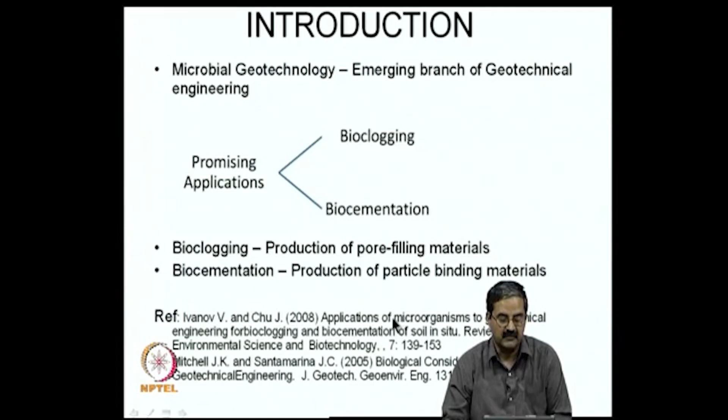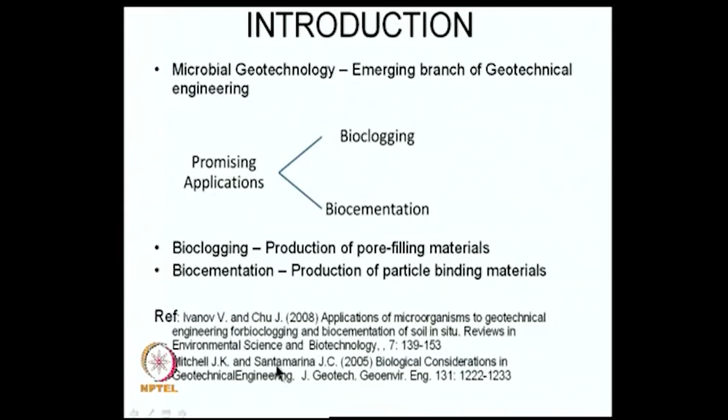There is a reference for this work; I must draw from the papers of Ivanov and Chu, particularly Chu, who has been working significantly in this area of ground improvement, and this is a paper from one of the journals of Environmental Science and Biotechnology. The thoughts for some of these ideas have been articulated by Professor Mitchell, an authority in soil behavior, and Santamarina, a professor at Georgia Tech. These two professors have a lot of vision, and they envisage use of biomaterials, bioclogging, biocementation, or biotechnology in the area of geotechnology.

This is what it is, and in this connection we need to identify suitable microorganisms. They are of different types: facultative anaerobic bacteria, microaerophilic bacteria, anaerobic fermenting bacteria, anaerobic respiring bacteria, obligate aerobic bacteria. There could be different types. In fact, it is said that the billions of bacteria present are so numerous in count that it's an unexplored area in biotechnology.

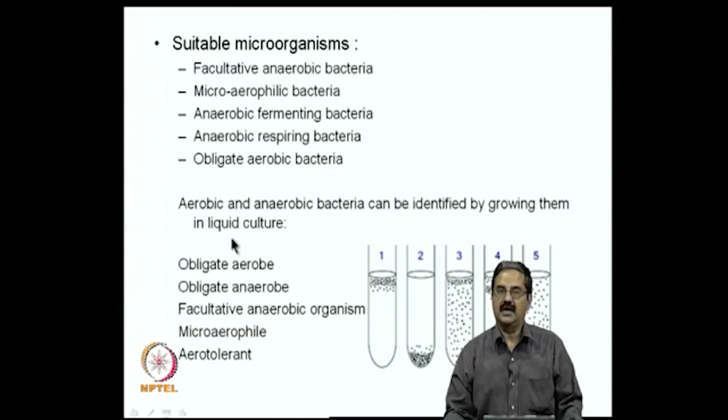What do all these mean? From an engineering point of view, I would like to make a simple differentiation. It is said that aerobic and anaerobic bacteria can be identified by growing them in a liquid culture. For example, if you take a tube and leave them, if the bacteria need oxygen or survive more in oxygen, they come up. So that is what I mean by aerobic bacteria.

But if they go down away from the air, then you can say it is anaerobic bacteria. Then there could be some bacteria called facultative; they can occur everywhere in general. The other type occurs in general, particularly in anaerobic conditions. Microaerophilic bacteria are more attracted towards this particular condition. The first one corresponds to obligate aerobes, obligate anaerobes, and then facultative anaerobic organisms could be like this.

Microaerophiles are close to wanting the presence of air. Sometimes you have another type, the air-tolerant ones. So one can understand that suitable microorganisms in soils include facultative anaerobic bacteria, microaerophilic bacteria, anaerobic fermenting bacteria, anaerobic respiring bacteria, and obligate aerobic bacteria.

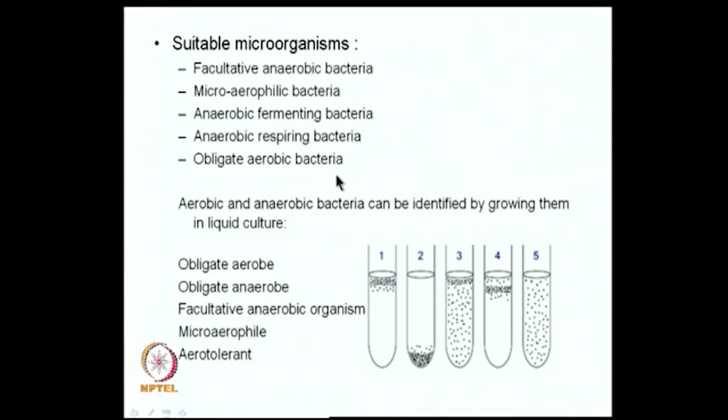A listing of these is given, and one should look at the size of bacteria. These are all very small living matter, ranging from millimeters to micrometers to even nanometers. People are even questioning whether you have nanobacteria. Definitely you have bacteria of very small sizes in this range, and if you look at the scale of millimeters, micrometers and nanometers, some atoms, polymers and molecules fall here too.

But when dealing with soil, you should understand the grain size distribution and particle size in soils. Clay minerals, for example, are less than 2 microns, which we call clays, and then you have silt and sand materials. So there is some relationship, and the size of the bacteria is somewhat compatible with these sizes, which helps us understand the interaction between clay minerals and bacteria.

If you look at sizes beyond this, corresponding to silts and sands, this means unhindered microbial motion and easy nutrient transport, so it is quite effective. But if the size is very fine, microorganisms cannot pass through pore throats, though they may be entrapped during formation. So you need to distinguish these two cases, since size has a big role in understanding the use of bacteria in soils.

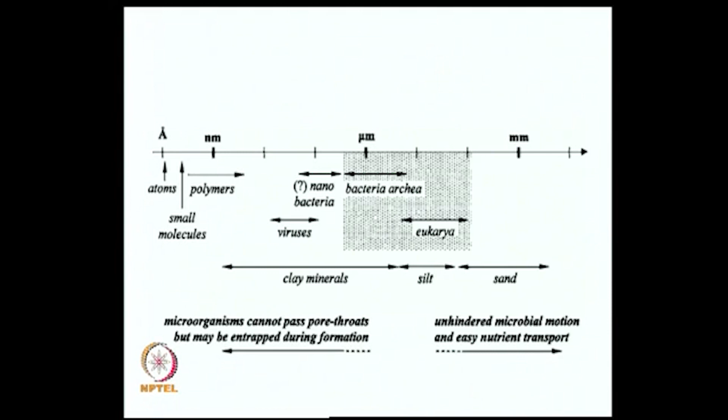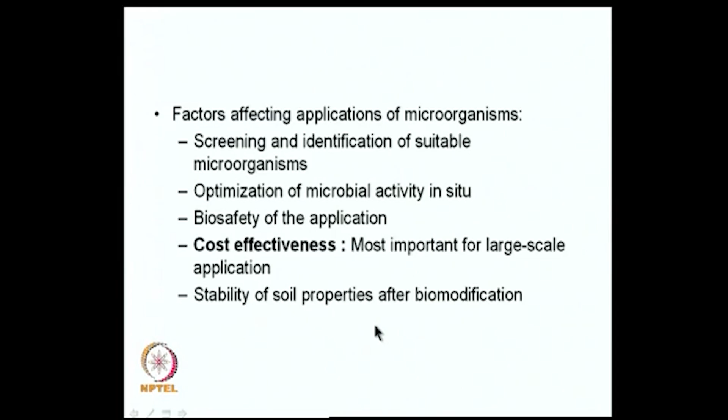What are the factors that affect the application of microorganisms? First and foremost, you must be able to screen and identify suitable microorganisms—there are too many, and you need the right ones for the right purpose. Then there's optimization of microbial activity in situ. When applying in the field, there are many variables, and you need the right quantity to obtain the desired effect.

Biosafety of the application is also very important, since safety is an issue when dealing with biomaterials, and it should not lead to complications like viruses and other problems. Cost effectiveness is also important for large scale applications. For laboratory and exploratory studies it may be fine, but for large scale applications, the biomaterial or technique needs to be cost effective.

You should also consider the stability of soil properties after biomodification—what happens to soil properties after modifying them with biomaterials and bacteria. So the factors affecting the application of microorganisms involve several issues that need to be satisfied to get the maximum effect from these materials.

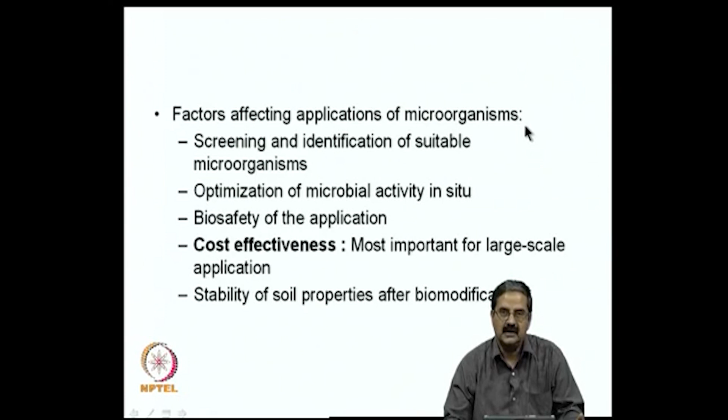I would just mention bioclogging. Bioclogging reduces porosity and hydraulic conductivity of soil and porous rocks due to microbial activity and its products. It is used as a sealing material for leaking construction pits, landfills or dikes. Wherever there is a leak, porosity is higher and you want to reduce the leakage, so you apply bioclogging.

There are also cases where it's used as a grouting material for soil erosion control, mitigating liquefaction, and enclosing bioremediation zones. For example, if you have a bioremediation zone that needs to be contained in a particular area, isolated from adjacent areas, you can use bioclogging for that purpose.

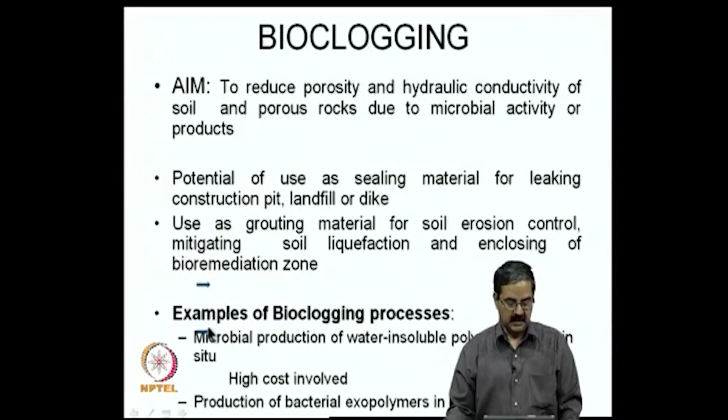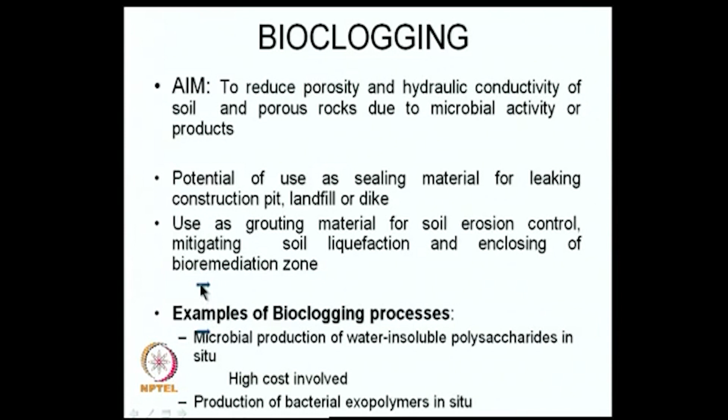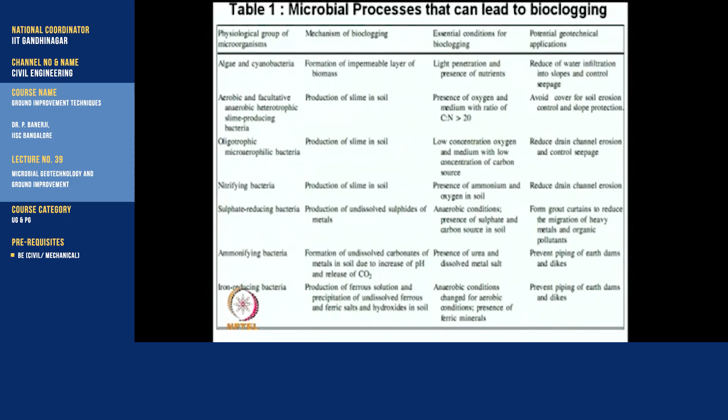In this table, there are different items mentioned. One is the physiological group of microorganisms, what type of groups they belong to. For example, algae, aerobic and facultative anaerobic bacteria, oligotrophic bacteria, nitrifying bacteria, sulfate reducing bacteria, ammonifying bacteria, iron reducing bacteria. There are many types of bacteria, and one should have a good knowledge of biotechnology or microbiology here, and it is always better to interact with a microbiologist who understands your requirements and helps in experimentation at a laboratory scale to see the actual response of the soil.

When you have so many types of bacteria, what is the mechanism one can have? The mechanisms of bioclogging can be a few: formation of an impermeable layer of biomass, production of slime in soil, production of undissolved sulfides of metals, formation of undissolved carbonates of metals in soil due to increase of pH and release of carbon dioxide, production of iron or ferrous solution, and precipitation of undissolved ferrous and ferric salts and hydroxides in soil.

So there are various mechanisms that one should really look at in terms of analysis, and then look at what is going to happen and what could be the likely mechanisms when you add certain bacteria.

Once you add certain bacteria, there are essential conditions required for effectiveness of the system. Take a particular bacteria, say algae, it needs light penetration and presence of nutrients. Algae cannot grow without the presence of light and nutrients. A common example is algae growth in lakes.

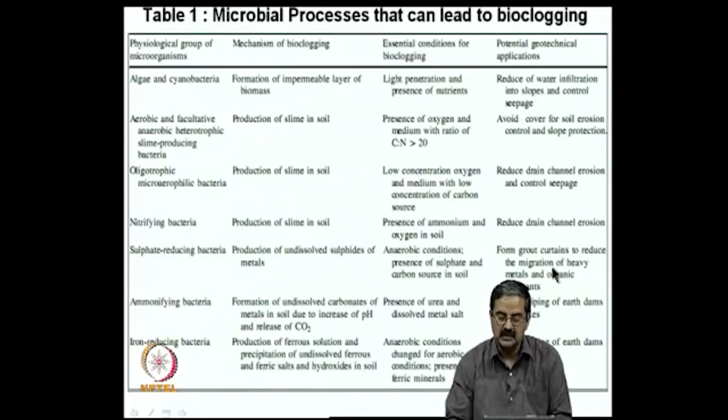With oligotrophic bacteria, applications include reducing drain channel erosion and controlling seepage. Sulfate reducing bacteria are used for grout curtains and other purposes. Ammonifying bacteria prevent piping of dams and piping in earth dams. Some of these applications are mentioned, and one should be thorough in understanding these concepts.

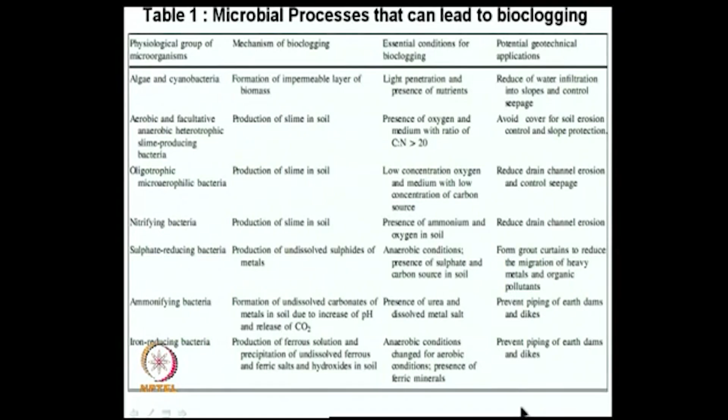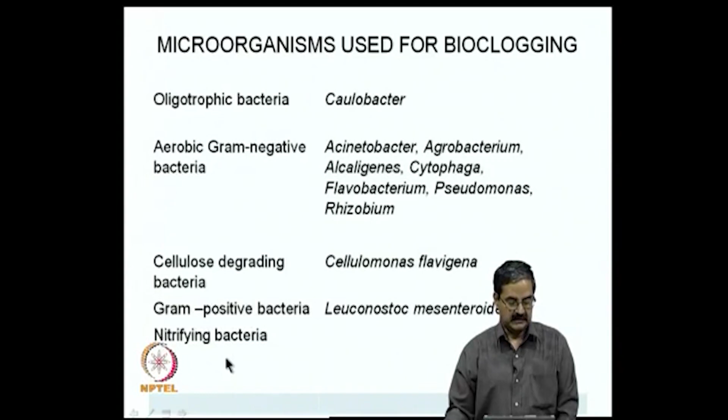There are some more microorganisms for bioclogging, as mentioned here. You can see there are a number of candidate bacteria for geotechnical purposes.

Some applications include exopolysaccharide producing bacteria, one of the products obtained. Exopolysaccharide, produced by bacteria, is useful in reducing the permeability of soil, selective zonal bioremediation, harbor and dam control, and earthquake liquefaction mitigation. Cost of soil clogging could be reduced by using organic waste for producing exopolysaccharides, to reduce drain channel erosion, to form grout curtains, and to diminish migration of heavy metals and organic pollutants.

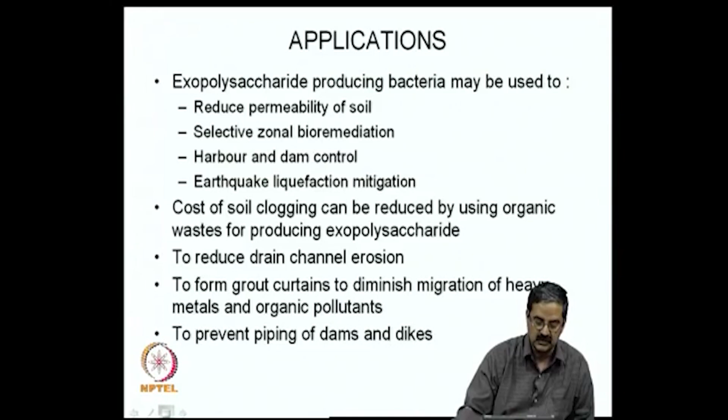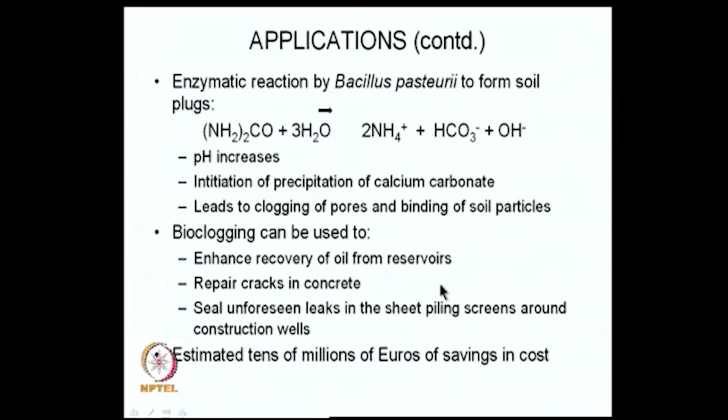Bioclogging can be used to enhance recovery of oil from reservoirs, repair cracks in concrete, and seal unforeseen leaks in sheet piling screens around construction wells. People estimate that the cost of growing bacteria is not significant compared to other methods, for example repairing cracks with cement in concrete, which is quite expensive, whereas bioclogging could be much cheaper, leading to a lot of savings in cost.

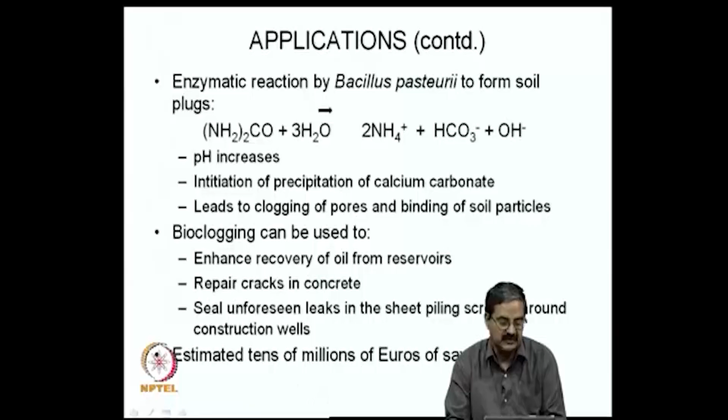One should understand that these are all exploratory techniques, and a lot of research is required. People have been trying to look at it, and definitely in the area of ground improvement, sustainability has become a key issue.

For example, if there is a pile to be used, a pile needs steel and concrete. If you look at the quantity of steel and concrete used in a project and compare it with a stone column, and if both serve the same purpose such as load carrying capacity, and you design so that the load carrying capacity due to piles is the same as due to stone columns, definitely the carbon credits you save, or the carbon footprint reduction, is better in the case of stone columns. But even stone columns need stone aggregates, so if you have any means of reducing the stone aggregates, it is very good.

So if instead of stone columns you try to use waste materials in the column structure, and also try to contain them in some form, definitely it is going to be more cost effective or more sensible from an environmental point of view. There are a lot of issues, and that is why people have been looking at these bioremediation techniques for improving the ground.

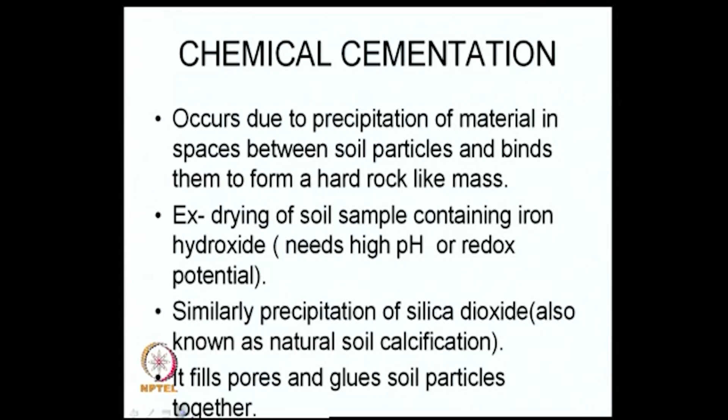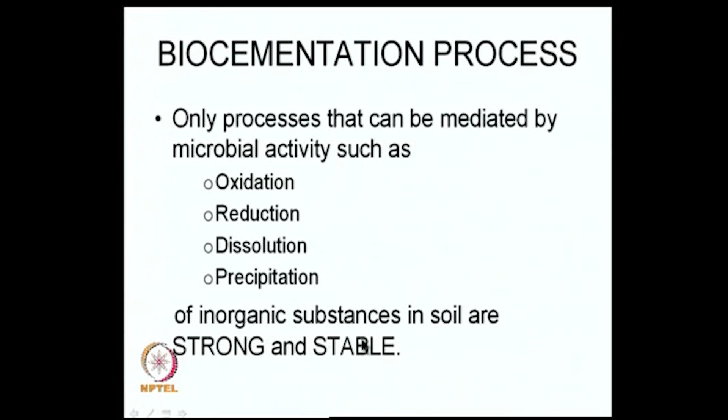So in the biocementation process, you have a couple of activities like oxidation, reduction, dissolution, and precipitation of inorganic substances in soil, and they are strong and stable.

So, to sum up the processes we have in cementation: binding of soil particles with sulfides of metals produced by sulfate reducing bacteria - if you have sulfate reducing bacteria, they release sulfides of metals which are useful in binding. Also binding of soil particles with carbonates of metals produced due to hydrolysis of urea. Then binding of particles with ferrous and ferric salts and hydroxides produced due to the activity of iron reducing bacteria.

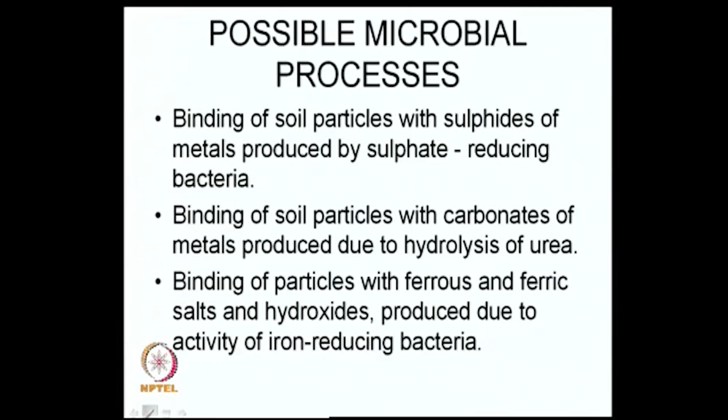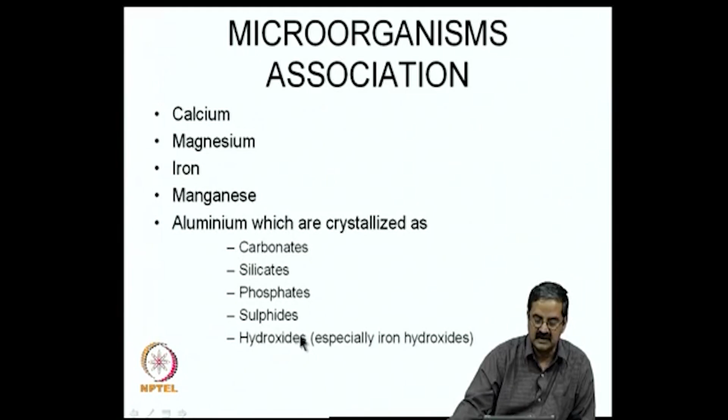So you have a couple of materials that are required here, which are quite helpful in the formation of cementation. If you have calcium, magnesium, iron, manganese and aluminum, which are crystallized as carbonates, silicates, phosphates, sulfides and hydroxides, definitely there is a possibility that you get good cementation.

One can get good strength in the material. For example, material plus urease producing microorganisms plus urea plus soluble calcium can lead to a cementing material.

There is research done on this line. Urease is a material which can be produced by microorganisms, and that leads to cementation.

Materials are nothing but conglomerates, breccia, sandstone, siltstone, shale, limestone, gypsum, peat, lignite, sand, clay, sediments and sawdust. If you have some of these materials and a urease producing microorganism, this combination definitely leads to high strength materials.

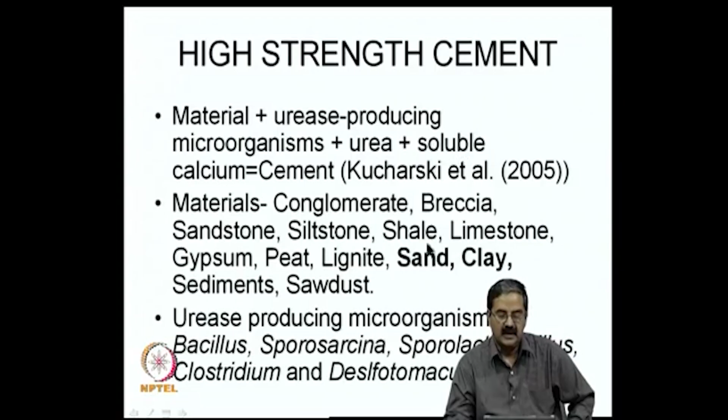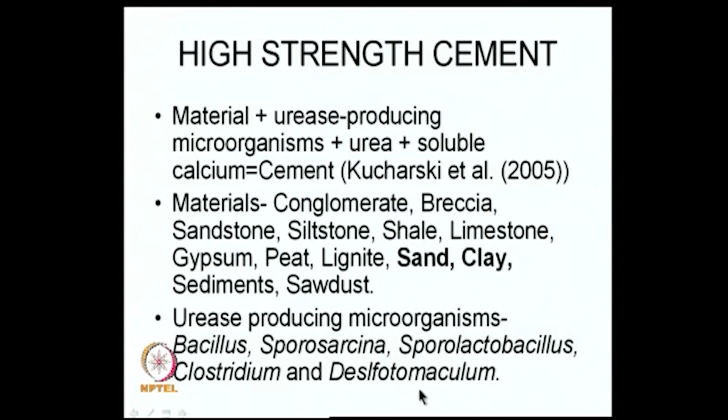Urease producing microorganisms are Bacillus, Sporosarcina, Sporolactobacillus, Clostridium and Desulfotomaculum. Of course, it is not easy to remember these names, but I think we need to take the help of a microbiologist or biotechnologist in this area to come out with meaningful engineering solutions.

Sand enriched with culture of iron reducing bacteria, fine particles of iron ore and cellulose as electron donor demonstrate that Fe+2 form can produce cementation effects. In fact, they noted that the unconfined compression strength can increase significantly.

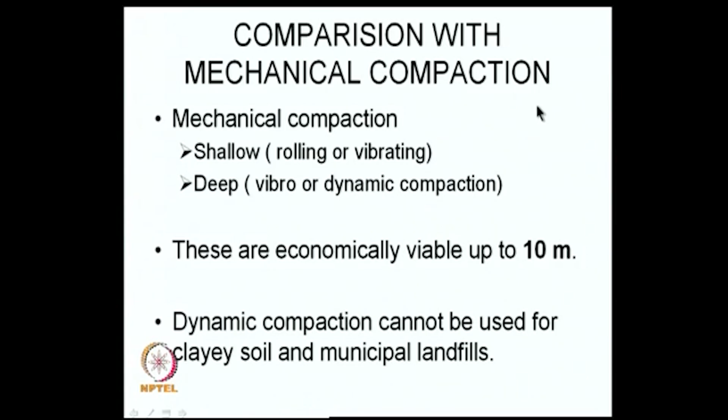Then how do you really use it in the field? We know that mechanical compaction is normally done, as I mentioned in one of the earliest lectures. It can be classified as shallow or deep. Shallow compaction uses rolling or vibrating machines. Deep mixing or deep compaction uses vibro or dynamic compaction methods, and these are economical up to 10 meters deep.

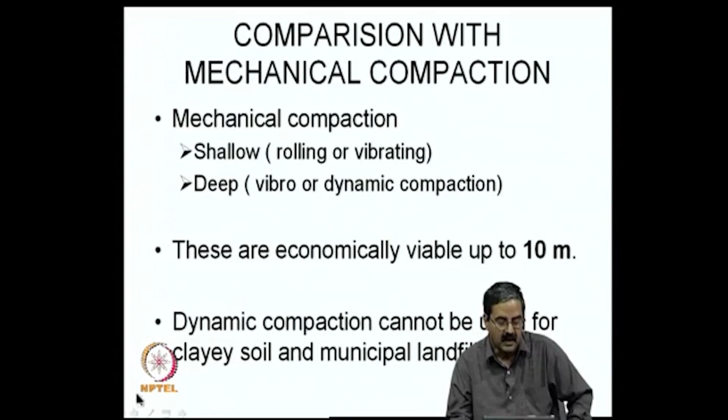Dynamic compaction cannot be used for clay soil and municipal solid waste. So when you can't do that, you try to compare these methods with the conventional techniques, that is mechanical compaction or mechanical modification.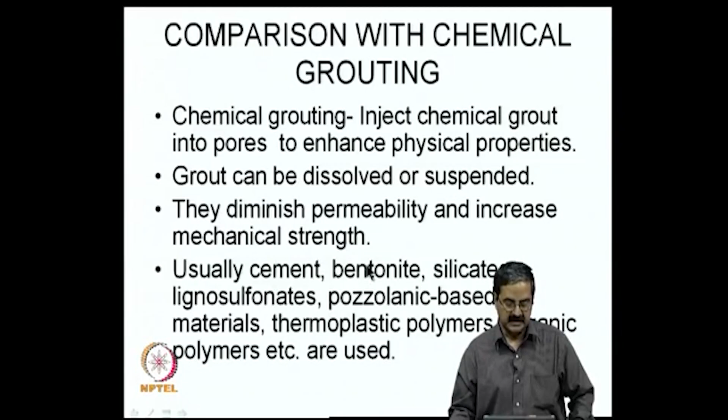The other option is chemical grout, where you inject chemical grout into pores to enhance physical properties. Grout can be dissolved or suspended, and it reduces permeability and increases mechanical strength. People normally use cement, bentonite, silicates, lignosulfonates, pozzolanic based materials, thermoplastic polymers and organic polymers, etc.

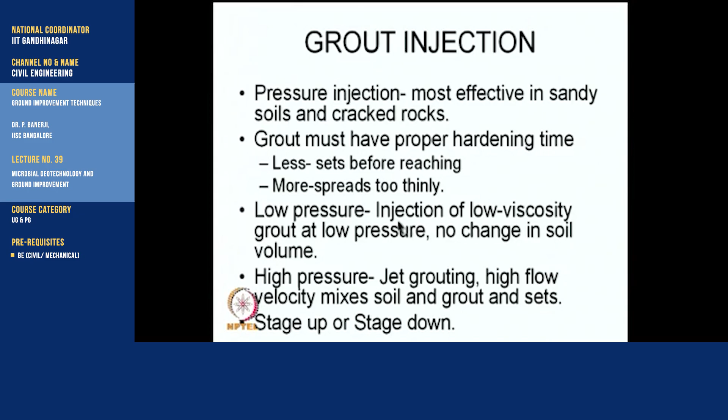We know about the method of grouting, and pressure injection grouting can be done in sandy soils and rocks. The grout must have proper hardening time, and low pressure is required in the case of low viscosity grout at low pressure with no change in soil volume. High pressure has another classification that we already studied: jet grouting, high flow velocity mixes soil and grout, and there are a lot of issues we already studied.

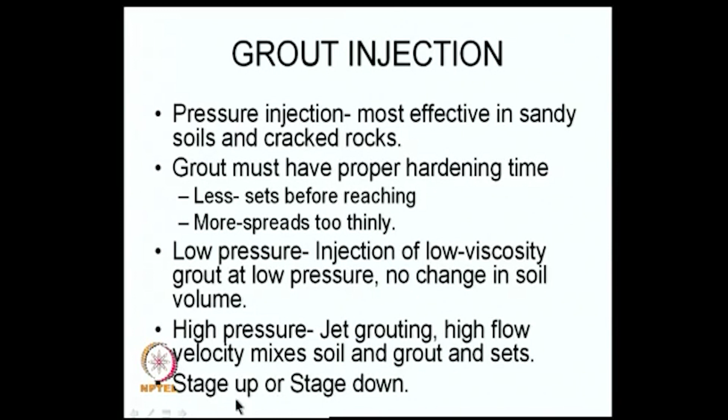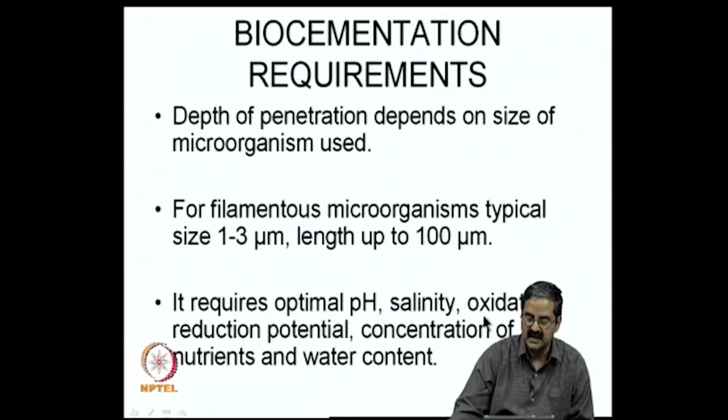When you are trying to use these materials, like biocementation, the requirements are as follows: depth of penetration depends on the size of the microorganism used. For filamentous microorganisms, typical size is 1 to 3 micrometers, lengths up to 100 micrometers. It requires optimal pH, salinity, oxidation reduction potential, concentration of nutrients and water content.

The advantages over chemical grouting are that they are non-toxic. For example, lignosulfonates, acrylamides and polyethylene are some of the toxic chemical grouts, as I discussed when covering grouting. And the cost of the reagents is low.

There is a cost comparison given in the paper I just read. For chemical grouting, you have lignosulphites, sodium silicate formulations, phenoplasts, acrylates, acrylamides, polyurethanes. The price is a little high, say 0.1 to 0.3, with polyurethanes being the highest. The amount of additive required per kg in meter cube is also given, along with cost of additives in dollars per meter cube.

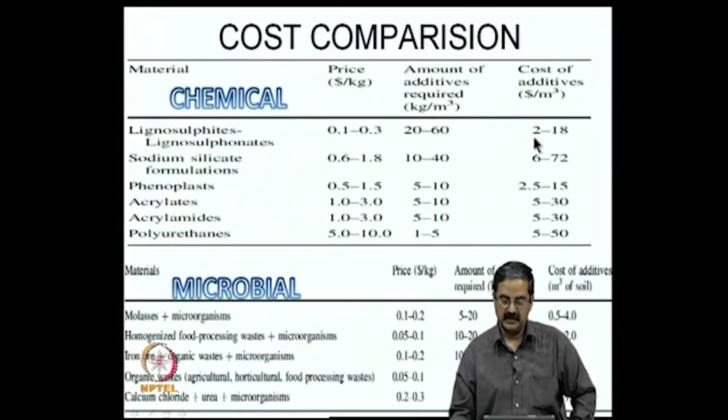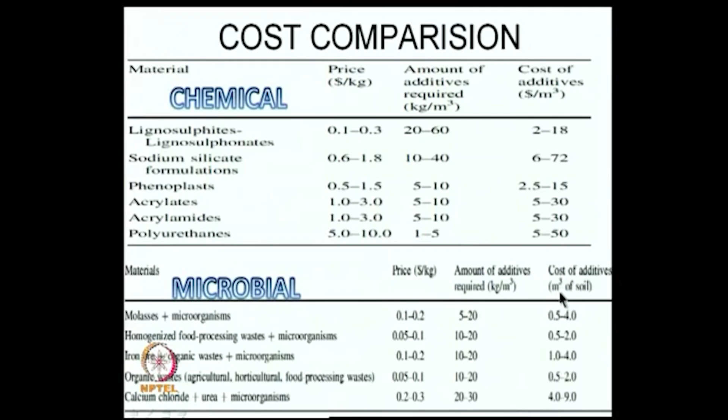When you compare this with microbial treatment, molasses plus microorganisms, the cost is somewhat less: price 0.1 to 0.2, 5 to 20 kg per meter cube additives required, and cost 0.5 to 4, comparatively less than the chemical grouting numbers. Homogenized food processing waste plus microorganisms, iron ore plus organic waste plus microorganisms, and calcium chloride plus urea plus microorganisms are an order shorter or cheaper compared to chemical grouting.

So, where can you use them? You can use them in the enhancement of stability of retaining walls. For example, if cohesion is required, normally we have a good backfill, fully draining backfill, if you want to improve the stability of the retaining wall in some sense.

One should design what the problem actually is, what stability calculations one can think of. If you are looking at retaining wall stability, embankment stability and dams, you should make a lot of calculations, and if the parameters do not satisfy the stability requirements, you need improvement. The parameters needed for retaining walls, embankments and dams are strength properties essentially, a higher strength so that the factors of safety can be higher.

Also you want deformations to be less so that stiffness can be improved. So if you have stiffness improvement and strength improvement by using this microbial matter or bacteria, then it is useful. One should do a lot of experiments to confirm this improvement is there and that it can be sustained for a long term.

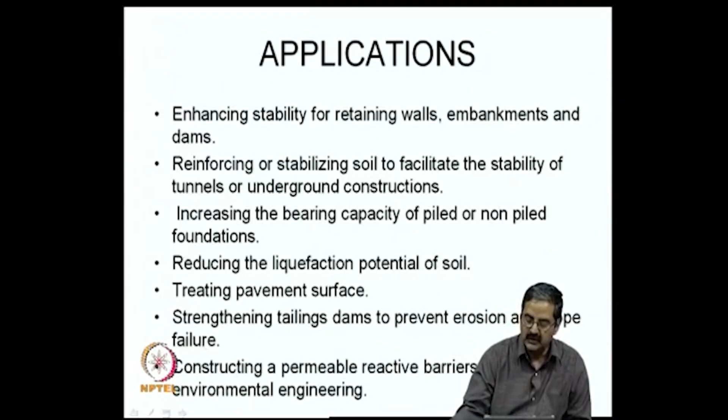In fact, in some places tailings dams are made of materials removed from mining, and they have a tendency to slip away, causing a lot of risk due to slope failures or erosion failures. One should ensure that by suitable strengthening, the erosion failures are avoided.

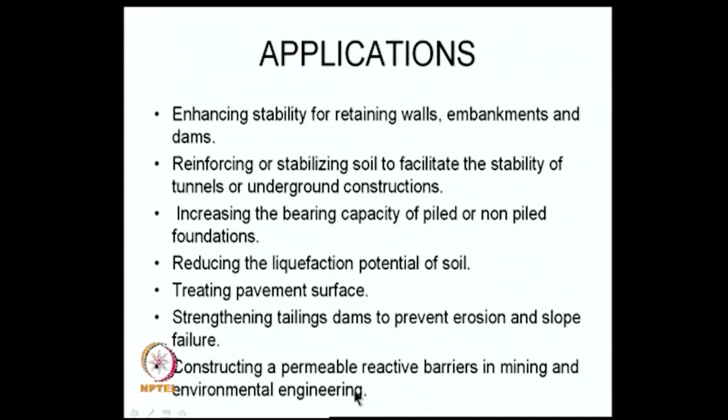Then constructing permeable reactive barriers in mining and environmental engineering.

So the applications are there: binding of dust particles on exposed surfaces to reduce dust levels, like if the bacteria can keep that dust from going into the air, that is a good thing, and increasing resistance to petroleum borehole degradation during drilling and extraction.

In fact, we use certain muds to increase borehole stability, but if biofilms can help in increasing the borehole stability, it is going to be nice.

Increasing the resistance of offshore structures to erosion of sediment within or beneath the gravity foundations or pipelines, particularly in offshore structures. Because of erosion, there is a possibility that the foundations of pipelines and other structures will have serious problems. So if we can increase strength or stability by introducing some biomaterials, it is going to be good.

Stabilizing soil pollutants from soil by binding. Of course, the movement or transfer of pollutants can be reduced by this material. Controlling erosion, erosion is something that is very important. Creating water filters and borehole filters, immobilizing bacterial cells into a cemented active biofilter.

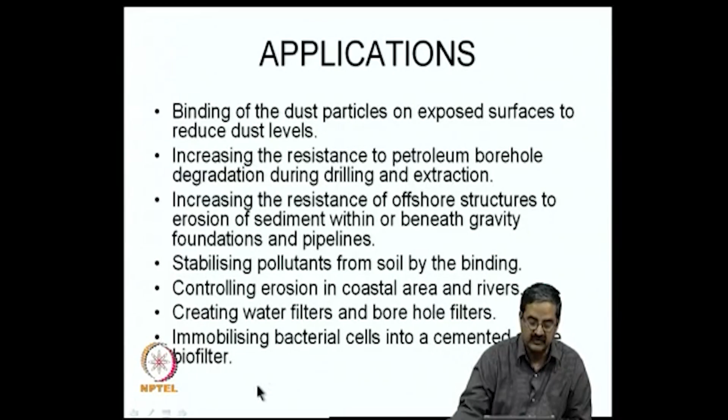These are all some applications one can have, and one should understand that the process of microbiology is a little slow, and it depends on complex factors like pH, concentration of donors and acceptors of electrons, temperature, and concentrations.

Apart from the soil conditions and the growing medium content, microbiological, ecological and geotechnical aspects must also be considered.

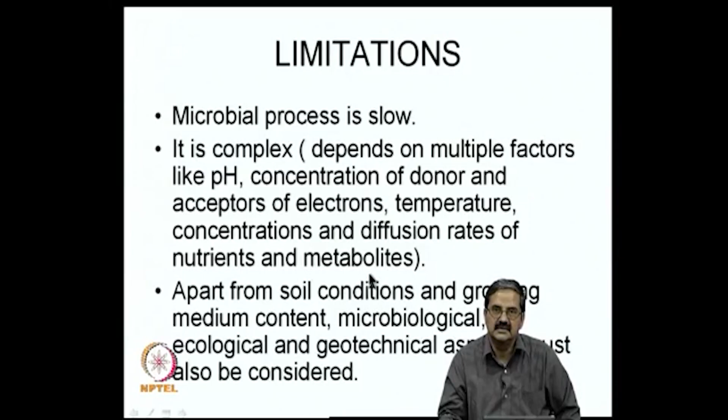Bioclogging and biocementation require data on the growth of bacteria, the biosynthesis, the mechanism of biosynthesis, biodegradation, bioreduction, biooxidation, specific enzymatic activities, precipitation, crystallization.

These are all important inputs. When you add bacteria into soil, you must be able to understand the growth of bacteria and how it is going to react with the soil. Some of these mechanisms are listed here, such as biosynthesis, biodegradation, bioreduction, biooxidation, and specific enzymatic activities. All these things should be understood.

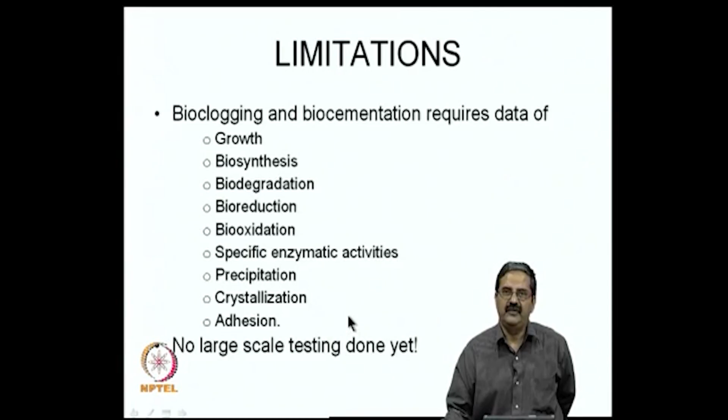Even precipitation of certain salts is also possible. People have done some of this at a laboratory scale, but not much laboratory work, and big scale field tests were not attempted.

This is just the beginning. Maybe serious work started only about 4-5 years back. People have been working on these lines in Japan, Singapore, and places like the US.

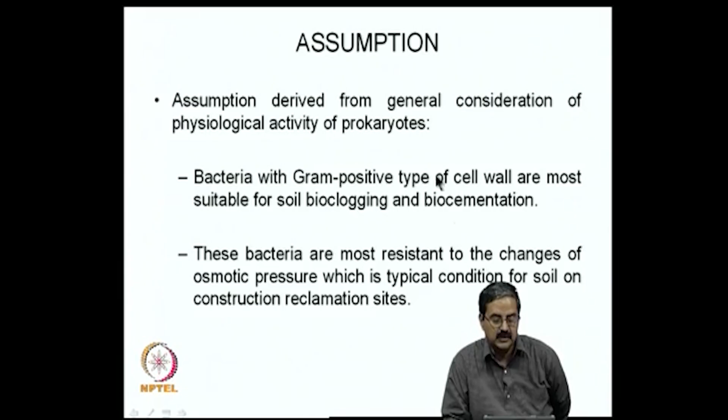Assumption derived from general consideration of physiological activity of prokaryotes. So, bacteria with gram-positive type of cell wall are most suitable for soil bioclogging and biocementation. These bacteria are most resistant to changes of osmotic pressure, which is a typical condition of soil on construction sites.

So, definitely if the bacteria are able to satisfy these two requirements, they are going to be very helpful. Then, screening of microorganisms: you need to identify the group of chemotrophic prokaryotes which have wide physiological diversity. Growth only on soil surface produces a rigid crust, which diminishes soil infiltration and improves slope stability. So, lower layers become anaerobic and hence less efficient.

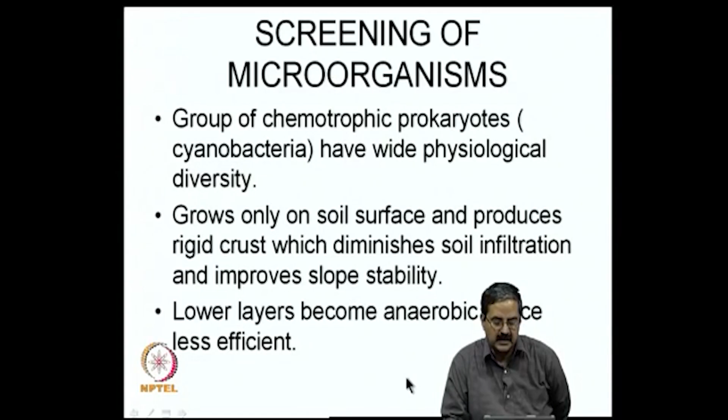One should understand that there are many processes in screening. For example, anaerobic fermenting bacteria should be used when calcium, magnesium, or ferrous ions are present. Cementation is due to increase in pH caused by ammonification and carbon dioxide production in soil added with urea or waste protein. If carbohydrates are added, the bacteria diminish the pH and cause precipitation of silicates.

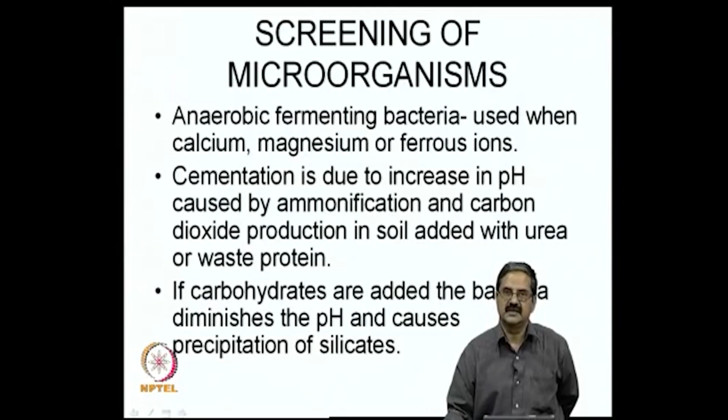Anaerobic fermenting bacteria cannot clog soil pores by synthesis of extracellular polymers, because they cannot produce a large quantity of slime. Organic acids, hydrogen, and alcohols can be used as donors of electrons, and some of these can be used for wastewater treatment as well, or even groundwater.

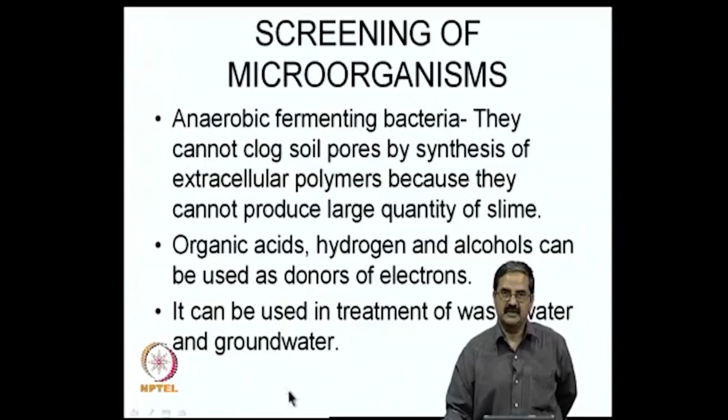So, you have sulfate reducing bacteria, as I just mentioned earlier. They produce dihydrogen sulfide using organic acids, hydrogen, or alcohols as electron donors, and sulfate as electron acceptor. Sulfide reacts with iron and other metal to form insoluble sulfides of metals. These clog the soil pores and bind the soil particles. The soil compaction created is unstable because they can be oxidized to sulfuric acid or sulfates.

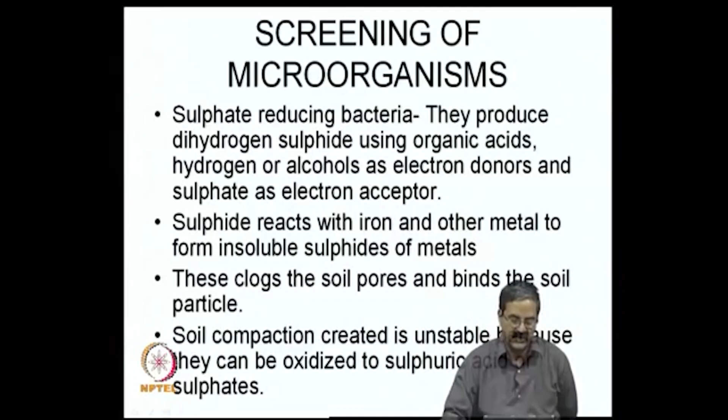Most suitable bioagents are ones that produce big quantities of exopolysaccharides, which usually promote formation of cell aggregates. They can work in both aerobic and anaerobic conditions, where both microzones of aerobic and anaerobic coexist. There are some examples here: Alcaligenes, Enterobacter, and some others given here.

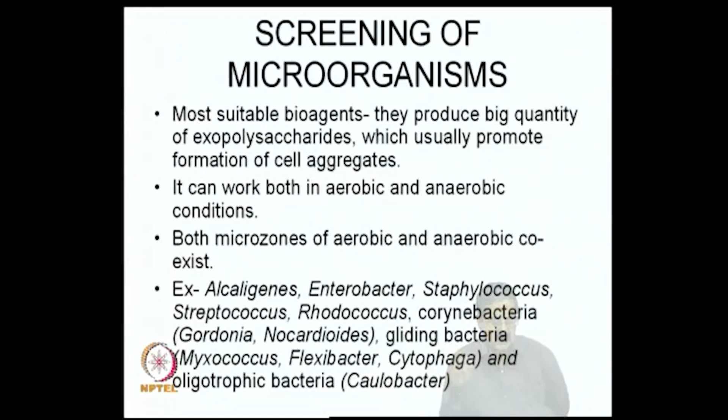Aerobic bacteria produce big quantities of slime, form chains and filaments, and increase pH, oxidizing different organic and inorganic substances. You also have actinomycetes being used. pH increases due to ammonification, and then insoluble carbonates are precipitated, forming particles that clog the soil pores.

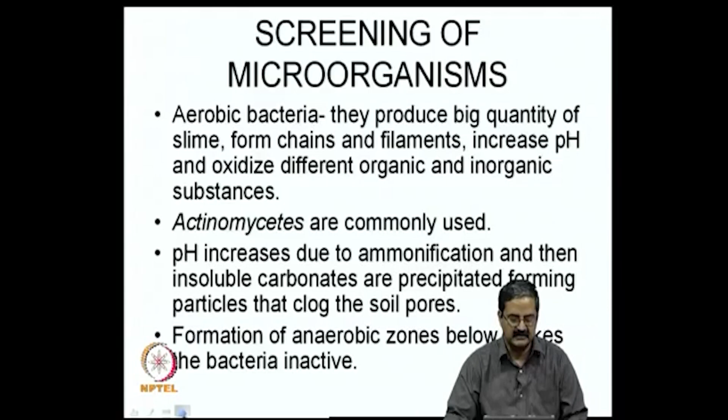Formation of anaerobic zones below the dikes makes the bacteria inactive. So, there is some way of screening the mechanisms here in relation to oxygen and type of energy generation. Of course, these are all taken from literature. One needs to really do some experiments on this, one can.

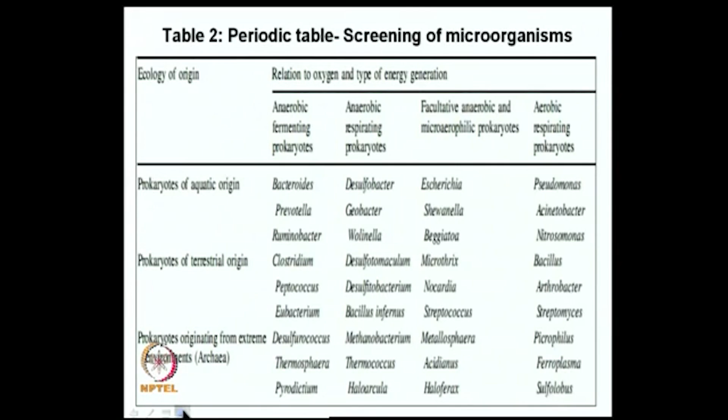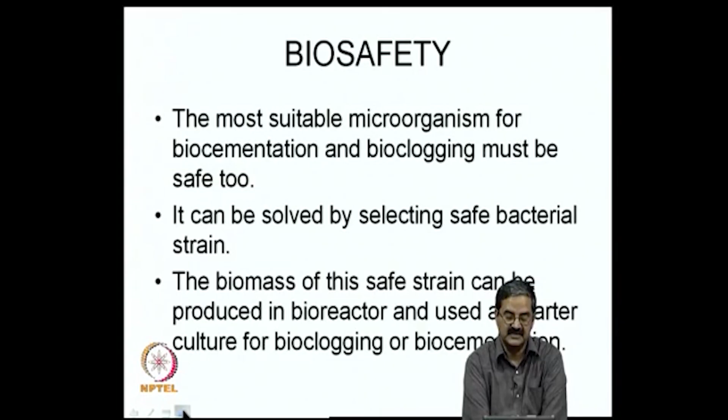A very important thing I mentioned earlier is biosafety. The most suitable microorganism for biocementation and bioclogging must be safe to use. This can be solved by selecting a safe bacterial strain. The biomass of this safe strain can be produced in a bioreactor and used as a starter culture for bioclogging or biocementation.

To diminish the risk of pathogenic accumulation, the following conditions are used: application of carbon sources which are used in nature by saprophytic microorganisms, such as cellulose containing agricultural waste, vegetable processing waste, etc., and conditions suitable for the growth of autolithotrophic bacteria, where carbon dioxide is used as carbon source and inorganic substances are used as electron donors.

The conditions suitable for application of bacteria able for anaerobic respiration use sulfate and ferric ion as electron acceptors. The application of some of these low carbon methods is also quite useful. It is important that the bioclogging and biocementation processes could be used to improve the mechanical properties of soil in situ, replacing energy demanding, expensive, and environmentally unfriendly methods with significant cost reduction.

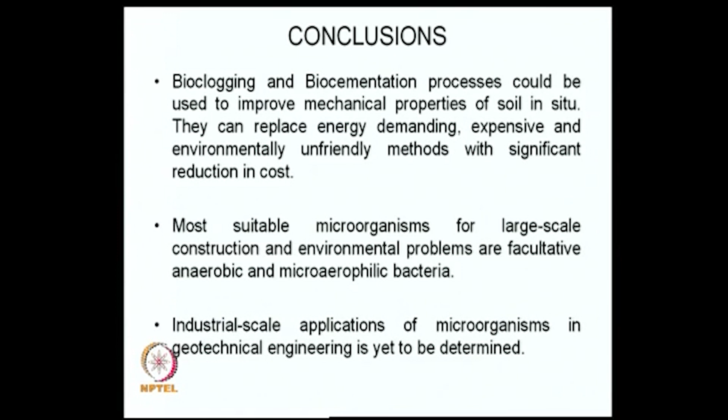I must also say that experiments conducted by Chu and other authors clearly indicate there is a reduction in permeability of a significant order. For example, instead of 10^-4 centimeters per second, it became 10^-2, or vice versa, which means a reduction of an order of 100. Even there was a good strength increase.

Most suitable microorganisms for large scale construction and environmental problems are facultative anaerobic and microaerophilic bacteria. So what is clear is that these bacteria are more general and one can use them for large scale construction. Industrial scale applications of microorganisms in geotechnology have not yet started.

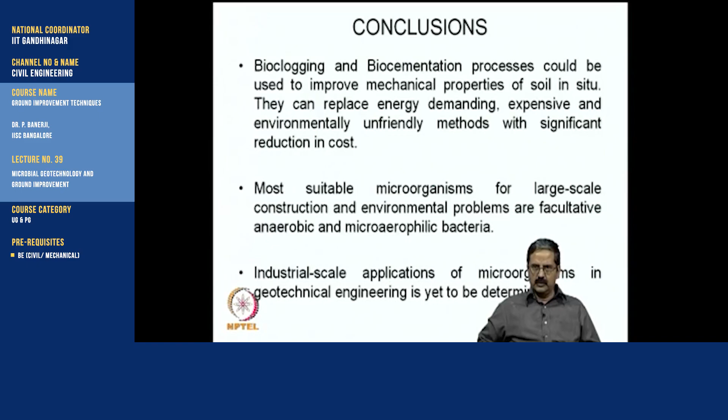Some of these, though they are on experimental scale, if they go to commercial scale, the possibility is that they can be an industry within themselves, similar to ground improvement technique companies that specialize in grouting. One can specialize in understanding what type of soil you have in a particular application, what type of microbes should be used, whether the conditions are sufficient, and if so, how to do a field laboratory experiment and come out with dosage requirements and environmental conditions to find the optimum benefit.

For example, if you are reducing the permeability, you try to come out with laboratory values of reduction in permeability as compared to the original value. Or if you are looking at strength improvement, look at what exactly is the order of strength required, and also do a laboratory count of the number of tests, and try to replicate the same in the field trials before one can go for field application.

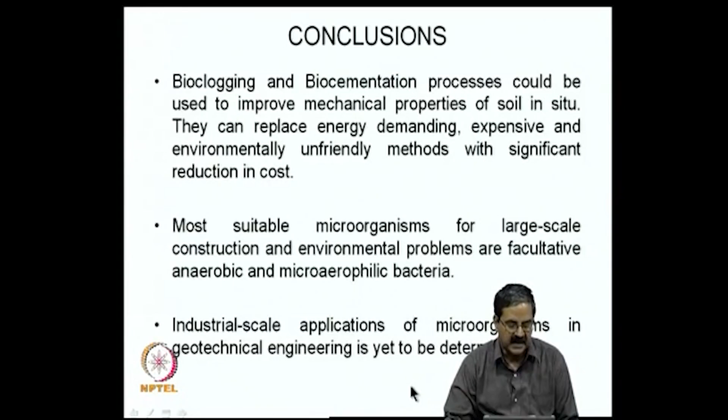So they have large scale industrial applications that people need to see.

With this, I would like to say that biocementation and bioclogging have a significant role to play in the development of sustainable geotechnical engineering practice, and considerable research is required. Though it has been done at a limited scale in many places, there is a lot of scope for geotechnical engineers to understand biomatter and material characteristics, and that is only possible in association with a suitable group of engineers who are also trying to give inputs into the whole system, resulting in improved biocementation or bioclogging systems that can be used for field practice.

The other point I would like to mention is that though there is an emphasis on biomatter here, in earlier lectures I was mentioning the use of natural fibers, say natural geotextiles, for increasing slope stability. For example, there is a steep slope of about 60 degrees, and because of rainfall there is erosion of the slope. Use of natural geotextiles, say coir or jute geotextile, can help in that process.